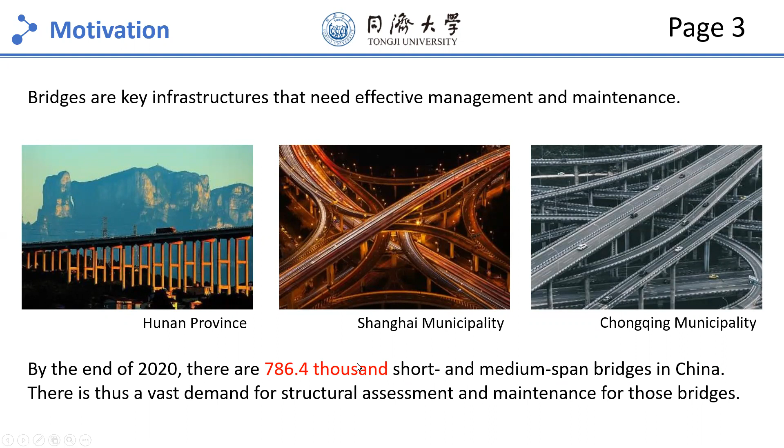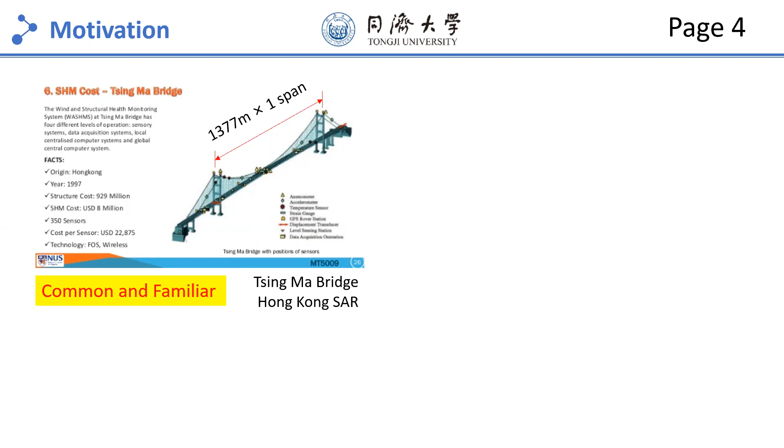When we talk about the bridge structural assessment, a common and familiar scenario is the engineering practice of the structural health monitoring on large-scale bridges. As this figure shows, the traditional structural health monitoring technique deploys an electronic system on the bridge, including sensors, wires, sampling instruments, and then we use the data recorded by the system to do structural assessment.

However, when it comes to short and medium span bridges, this method is inapplicable because small bridges are too many to deploy an electronic system on every bridge. Therefore, we need a new assessment approach for those bridges.

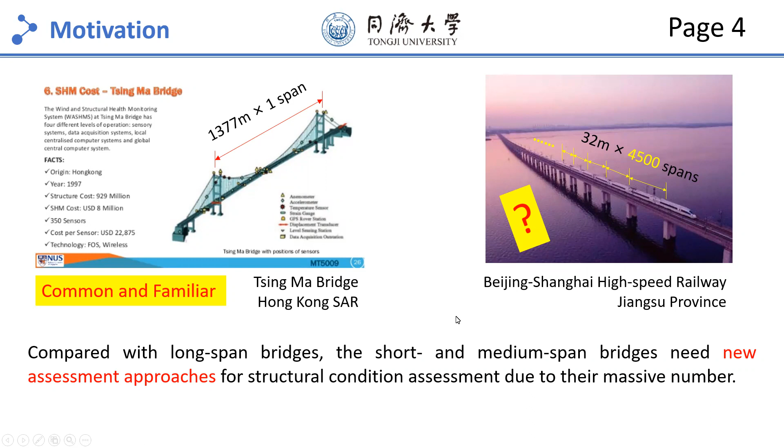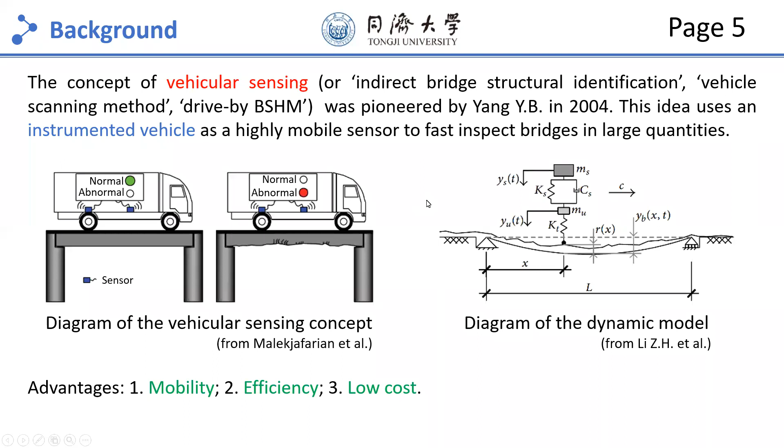Fortunately, a concept called vehicular sensing seems quite suitable for the assessment of small bridges. This concept uses an instrumented vehicle as a highly mobile sensor to indirectly measure the vibration of bridge structures. Since there is no need to deploy any sensor on the bridge, the vehicular sensing approach has the potential to fast inspect bridges in large quantities.

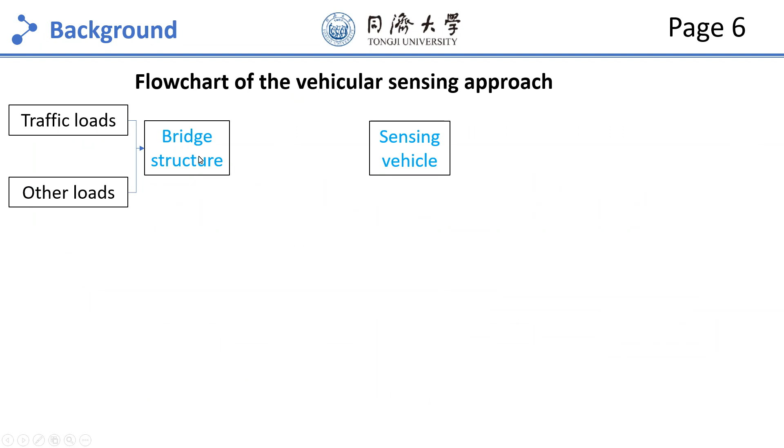This flowchart illustrates the vehicular sensing approach. As we can see, there are two subsystems. There are bridge system and vehicle system. Because of external loads, the bridge will vibrate, and then the bridge vibration will cause the sensing vehicle to vibrate as well. So the vibration of sensing vehicle will contain the bridge vibration component.

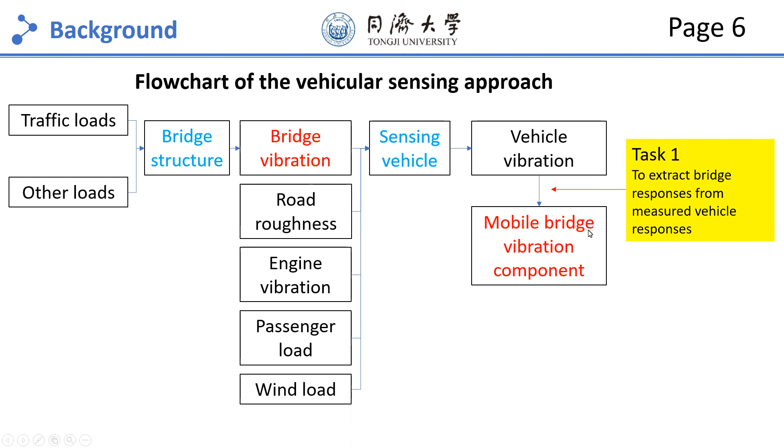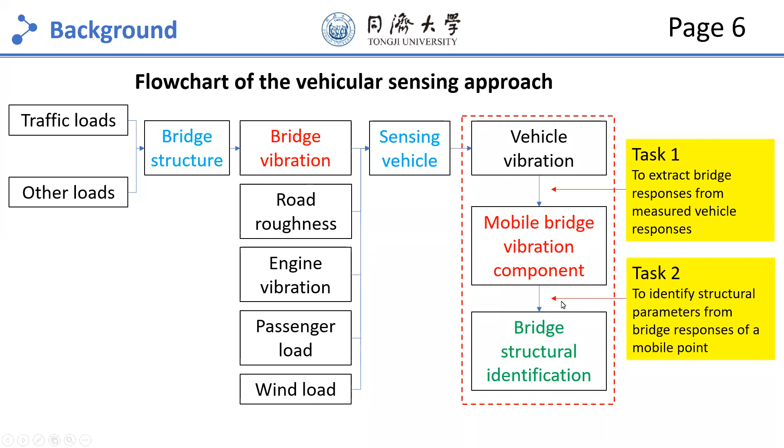However, other excitation sources such as road roughness, engine vibration, passenger load, and wind load, they will also cause the sensing vehicle to vibrate. So the first task of vehicular sensing is to extract the bridge vibration component from the measured vehicle responses. Then the second task is to identify bridge parameters from the extracted bridge vibration component. And this is the framework of the vehicular sensing approach.

Over the last decade, there have been a lot of studies on the vehicular sensing, but they're still facing some challenges. The first challenge is the oversimplified modeling. Most studies are based on a beam bridge model and a quarter car model, which I think cannot fully reproduce the vehicle bridge interaction. So I did some refined simulation in my studies.

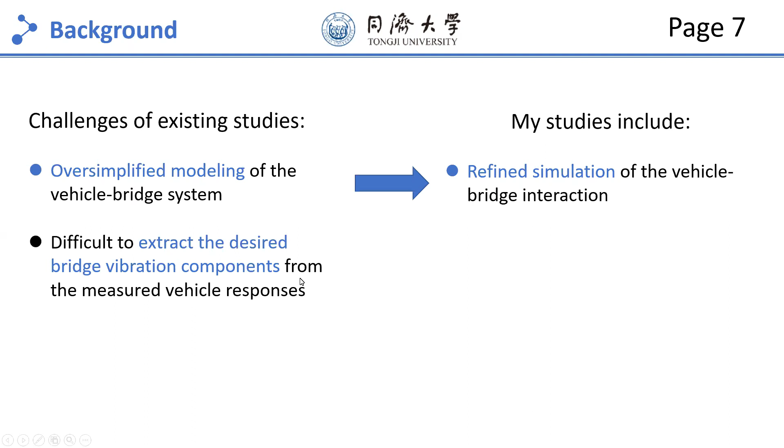Second, many studies are experiencing difficulties in the extraction of desired bridge vibration components from the measured vehicle responses. So I proposed some new methods to get the components we need in my studies. Third, but not least, most studies on the vehicular sensing are based on theoretical analysis or numerical simulation. There is a lack of experimental verification. So I carried out some experiments on real bridges with a real car.

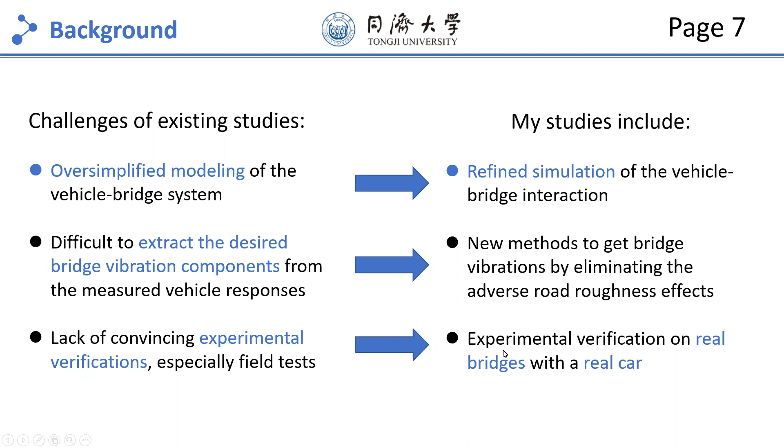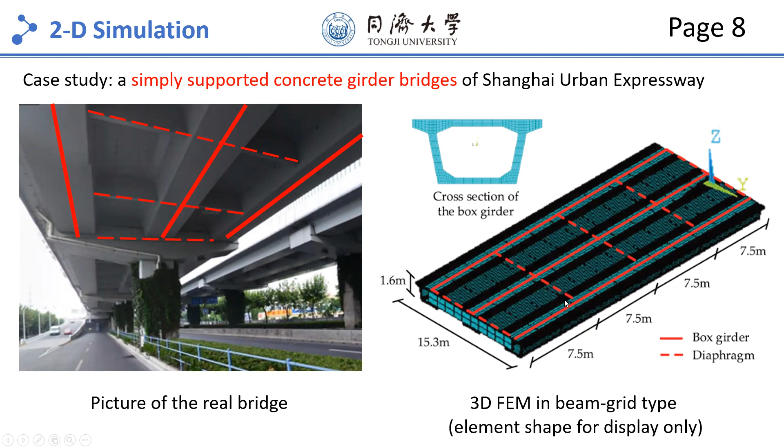In terms of vehicles, I designed a unique vehicle which consists of 1 tractor and 3 sensing trailers. The tractor is a normal truck used to tow the sensing trailers and excite the bridge. There is no sensor on the tractor. The sensing trailer only has 1 axle, and they are instrumented with accelerometers. This design provides many benefits, including the elimination of the road roughness. I will introduce this important concept later.

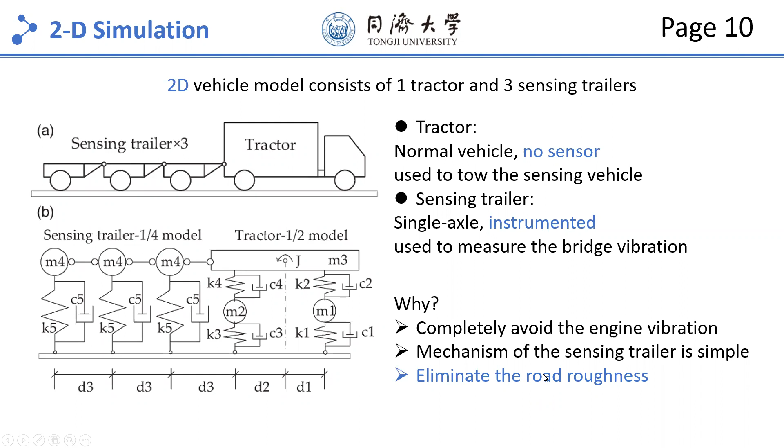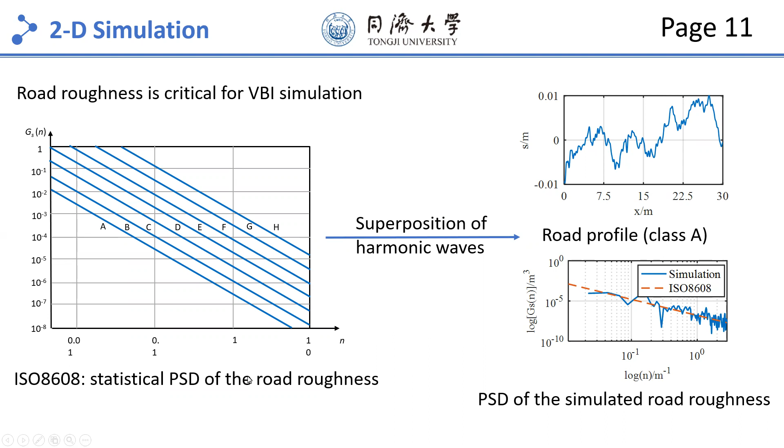Simulation of the road roughness is also crucial to the simulation of vehicle-bridge interaction. And here I simulated the road roughness according to the international standard. The bridge model and the vehicle model are assembled with an assumption that wheels and road surface are closely contacted. Then I simulated a numerical case as this diagram shows. The simulation was done in MATLAB with the Newmark beta method.

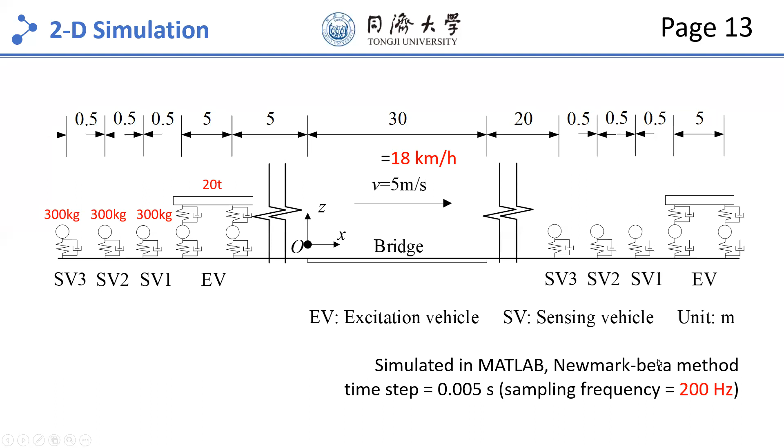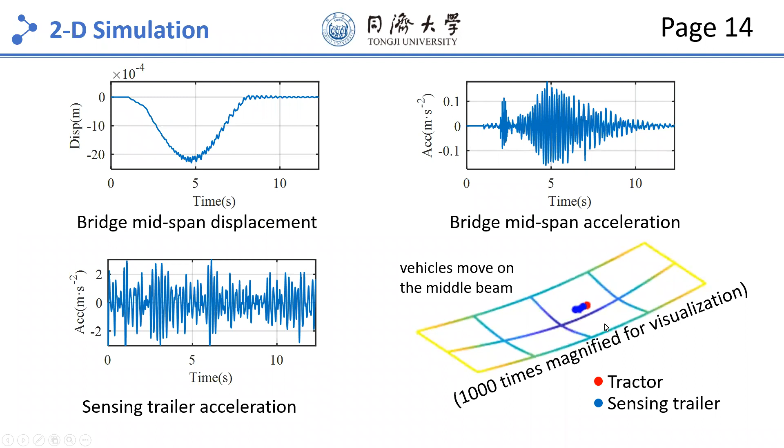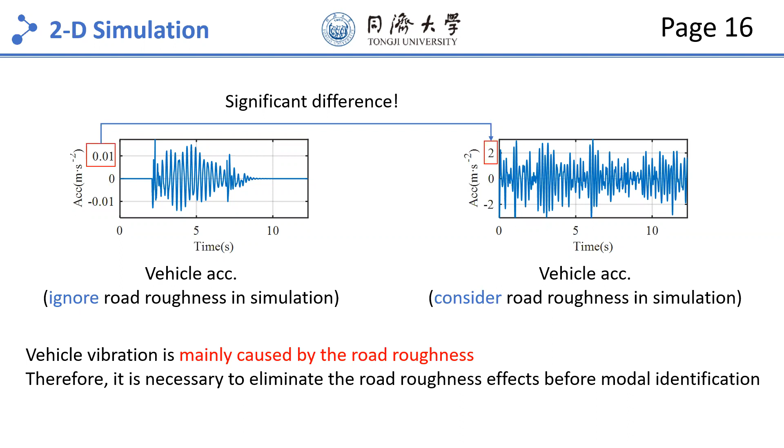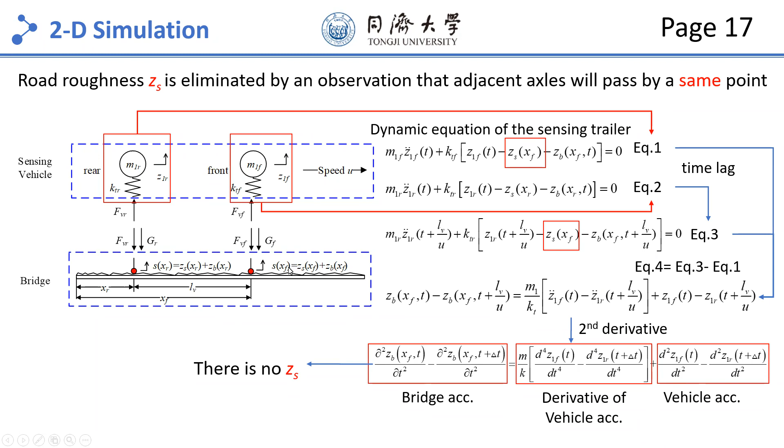So I tried to eliminate the road roughness effects on the sensing trailer. The elimination process is illustrated here. These equations look complicated, but the idea is actually very simple. Here I use an observation that 2 adjacent axles will pass by the same point on the road with a time lag. Since the road roughness at the same point is a constant, subtracting the accelerations of the 2 adjacent axles with a time lag can theoretically eliminate the road roughness.

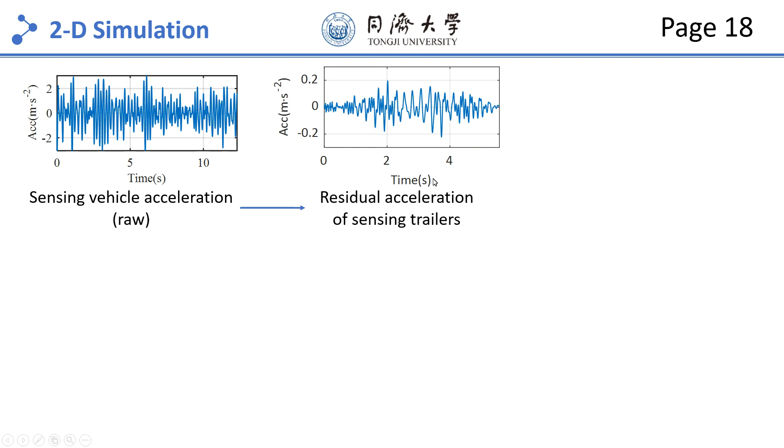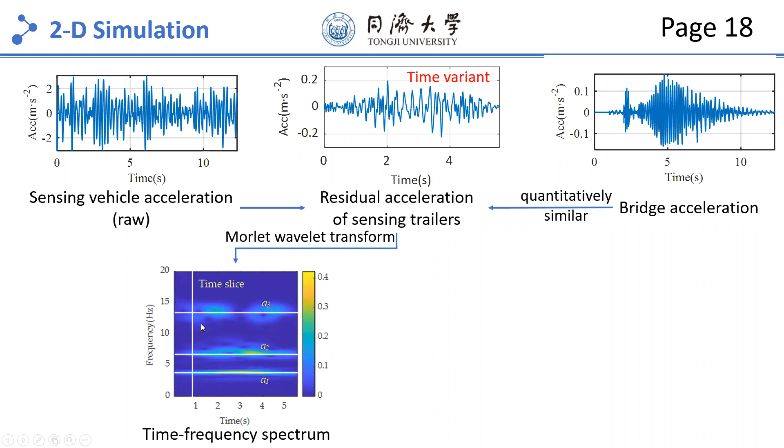This figure illustrates the results of the elimination of road roughness. After the elimination, we can find that the residual trailer acceleration is quantitatively similar to the bridge acceleration. I think that means the road roughness is successfully eliminated. Then the time frequency spectrum can be obtained by implementing the wavelet transform on the residual acceleration. Then we slice the spectrum on the time dimension, and we can identify the frequency of the bridge.

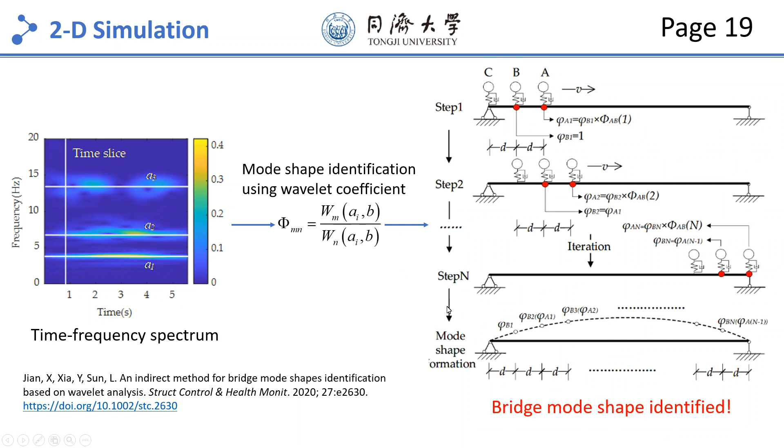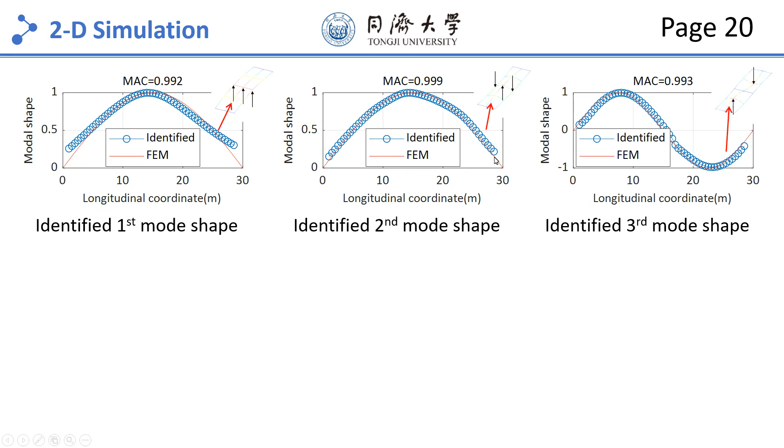Subsequently, according to the wavelet-based modal analysis theory, I proposed a method to identify bridge modal shapes in an iterative way. The identification results of the first 3 modal shapes are plotted here. As you can see, the identified modal shapes have high accuracy and spatial resolution compared with the modal shapes obtained by the finite element method. Then sensitivity analysis is conducted to investigate the stability of the proposed method at different road roughness levels, different vehicle speeds, and different noise levels.

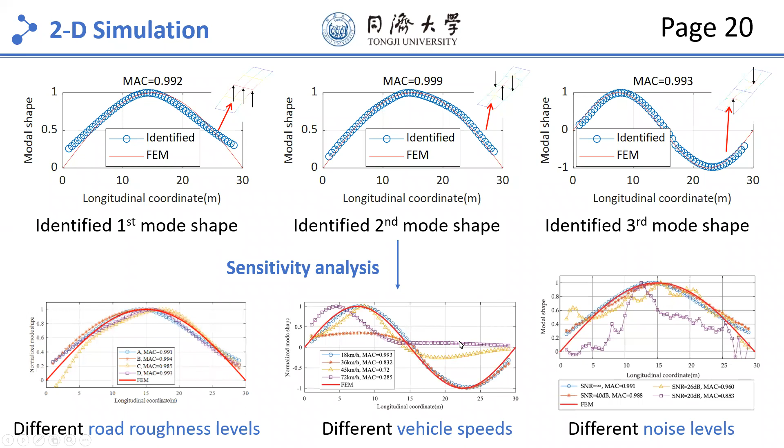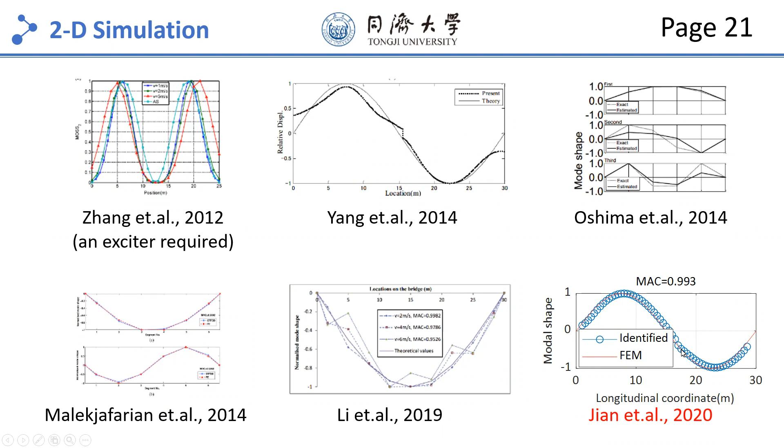Results indicate that the proposed method is insensitive to the road roughness, but it is sensitive to the vehicle speeds and noise levels. For comparison, I also display some mode shapes identified by other studies. In this slide, as you can see, my identification results perform better. So in this section, I proposed a method to identify bridge frequencies and mode shapes from the acceleration of vehicles. And the method has advantages over other studies.

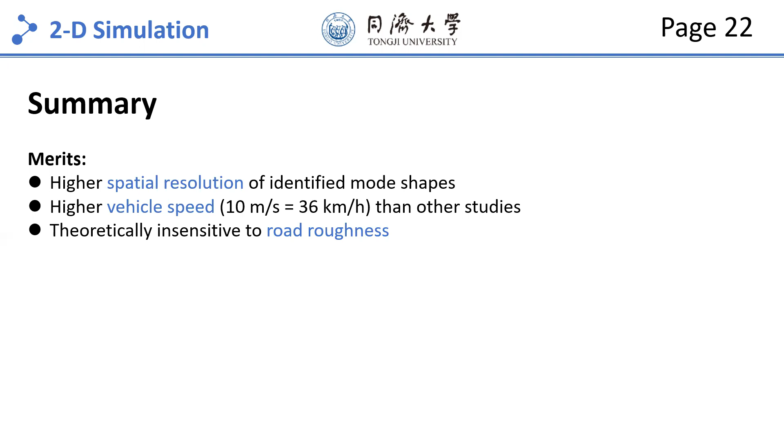But you may ask, does this method really work in engineering practice? Unfortunately, my answer is no. This method is inherently too sensitive to noise because of the iterative multiplication when identifying the mode shapes. Also, it requires 3 sensing trailers. As you know, towing 3 sensing trailers on the road is not very practical. And last but not least, in the simulation, the vehicle is 2-dimensional, but real vehicles are all 3-dimensional. So I think there is still a gap between the 2D simulation and the 3D simulation.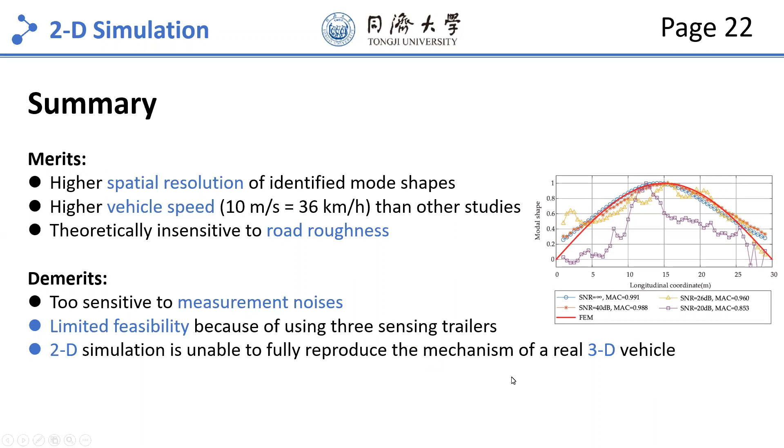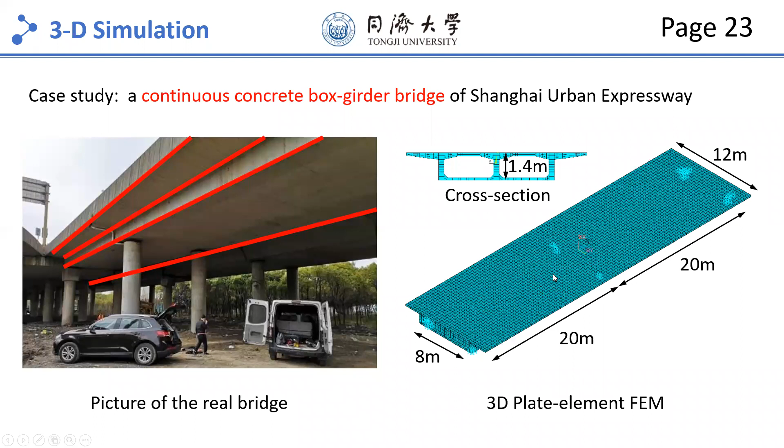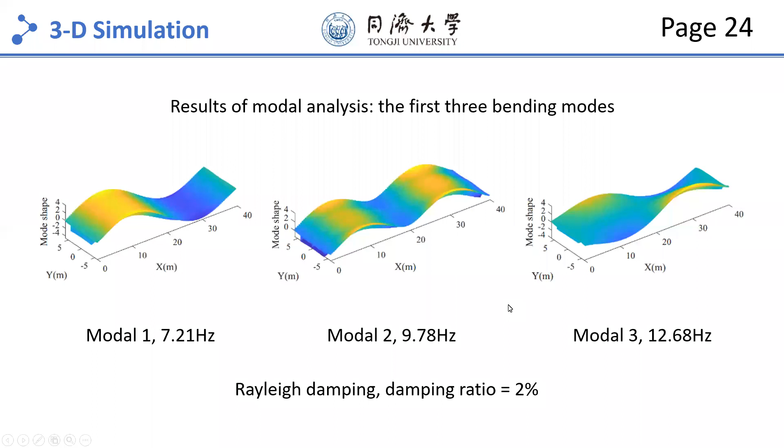Therefore, next, I decided to carry out another, 3D numerical simulation. There are seldom researchers using a 3D simulation to study vehicular sensing. And in this simulation, the bridge is simulated with a 3D plate element model. According to the modal analysis, the first 3 modes of the bridge are displayed here. And the vehicle is simulated with a 3D full car model, which has 7 degrees of freedom.

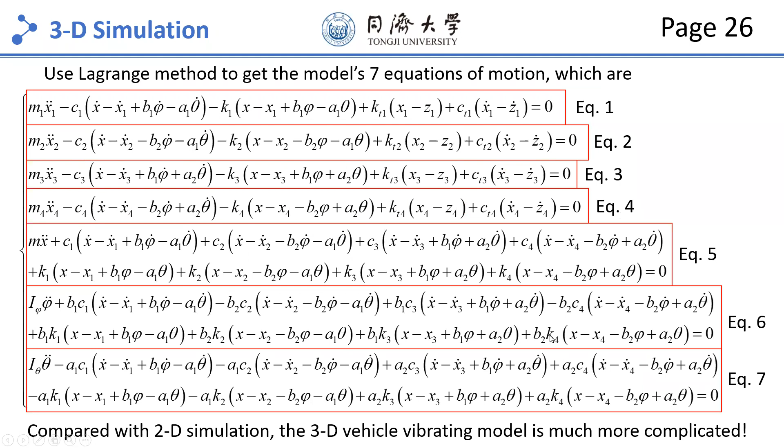The vehicle model's equations of motion are shown here. There are 7 equations in total. As you can see, compared with the 2D vehicle model, the 3D vehicle model is much more complicated because this vehicle has more degrees of freedom and more parameters. To conduct a numerical simulation, these equations are rewritten in matrix form.

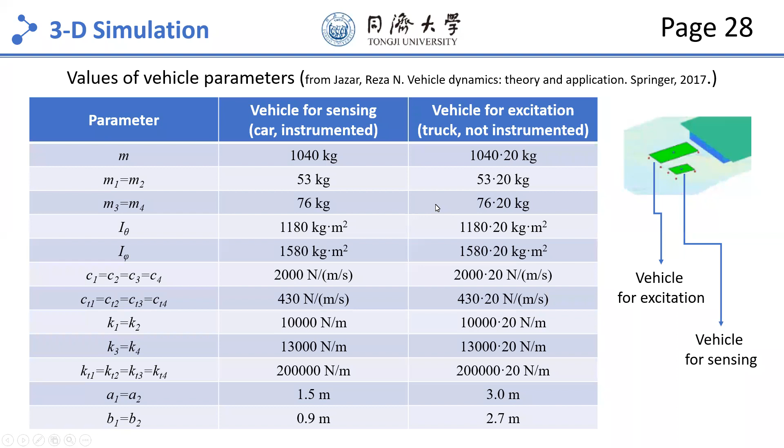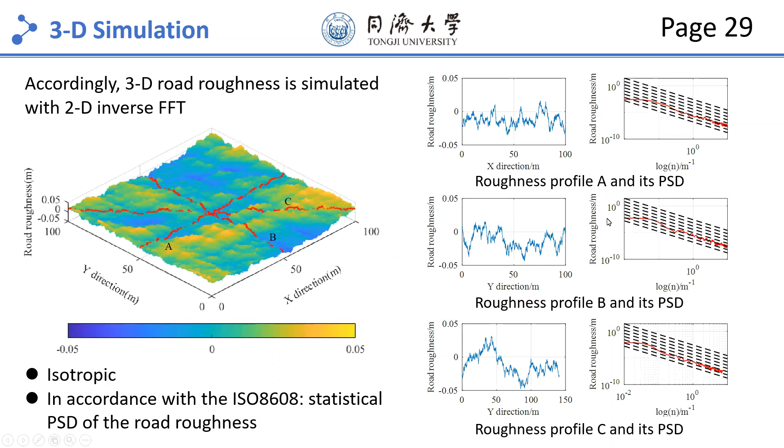And in the simulation, I use 2 vehicles. The small vehicle shown here is a car used for vehicular sensing. And the large vehicle is a truck used to excite the bridge. Parameters of the 2 vehicles are shown in the table. Accordingly, the road roughness is also simulated in a 3D form. The 3D road roughness surface is assumed to be isotropic, which means it has uniform physical properties in all directions, as the right figure shows.

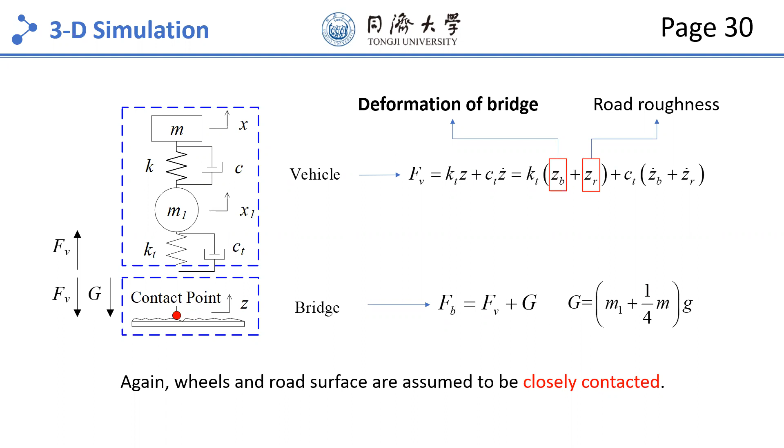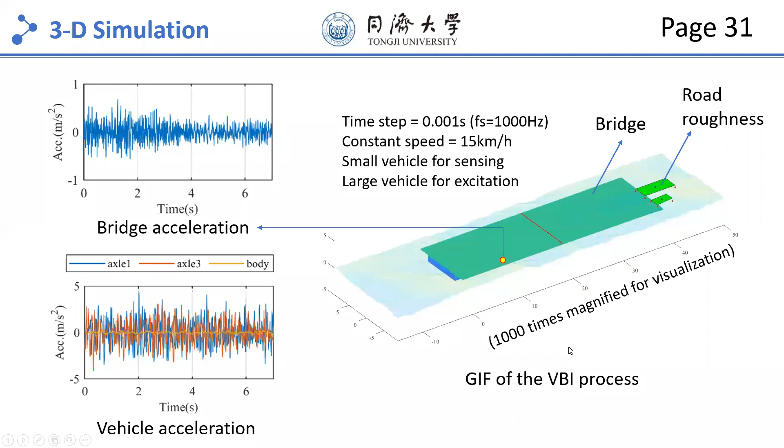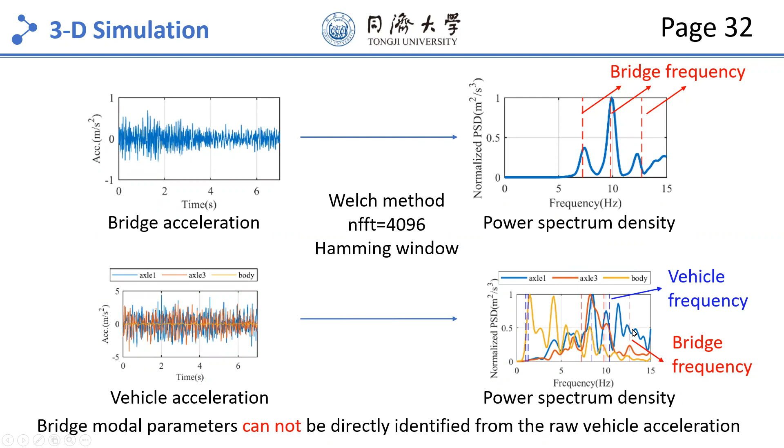Similar to the 2-dimensional simulation, the vehicle and the bridge are also assembled with the assumption that the wheels and the road surface are closely in contact. Then a case study is carried out and the simulation results are visualized here. Also, as you can see, the time history curves and the GIF here show the simulation results are reasonable for a vehicle bridge interaction system. So by observing the power spectral density of the bridge acceleration and the vehicle acceleration, we can know that once again, bridge modal parameters cannot be identified directly from the vehicle acceleration.

So similar to the two-dimensional simulation, it is imperative to first eliminate the road roughness effects before we do modal identification on bridges. To do so, we consider the equations of motion of 2 adjacent wheels. To eliminate the road roughness effects, I subtract the acceleration of the front wheel and the rear wheel. However, for a 3D vehicle model, the subtraction isn't as straightforward as in the 2D model because we have to consider the interaction between the different wheels and the vehicle body.

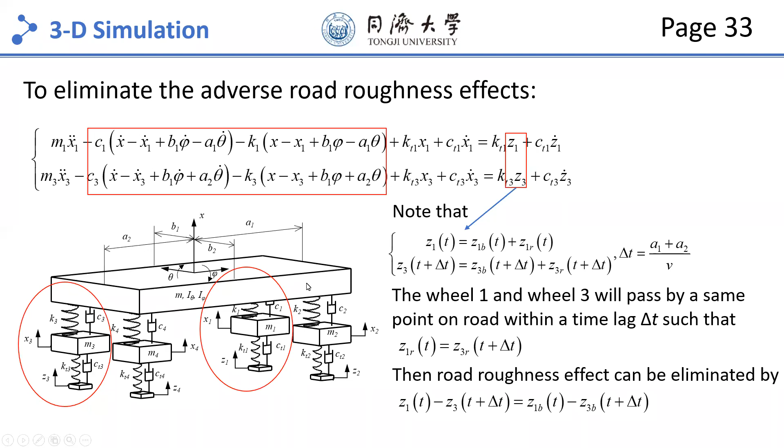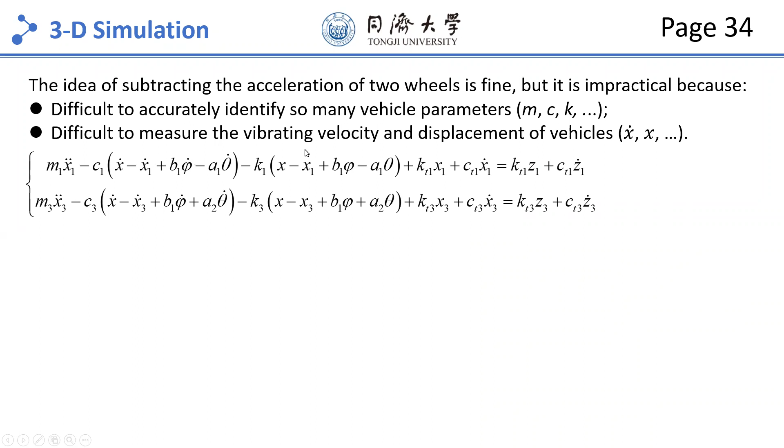Moreover, subtracting the acceleration of front and rear wheels in the time domain is very difficult, because on the one hand, it is difficult to identify so many vehicle parameters. And on the other hand, I think it is difficult to measure the vibrating velocity and displacement of vehicles in practice.

In view of this, I proposed a subtraction method in the frequency domain. First, I applied the Fourier transform on the wheels' equations of motion, and then I got the following equations. As you can see from the equations, the benefit of using the frequency domain is that we only need to identify one comprehensive parameter of vehicles for subtraction. And the comprehensive parameter highlighted with the red box here looks quite like the frequency response function. And we know that the frequency response function can be easily identified in some modal tests.

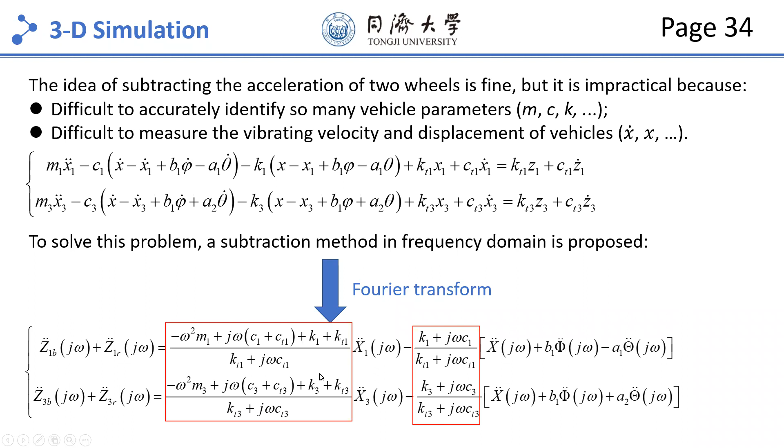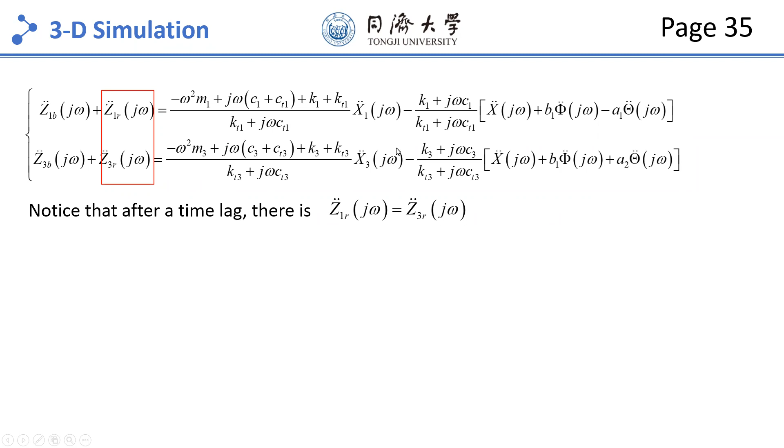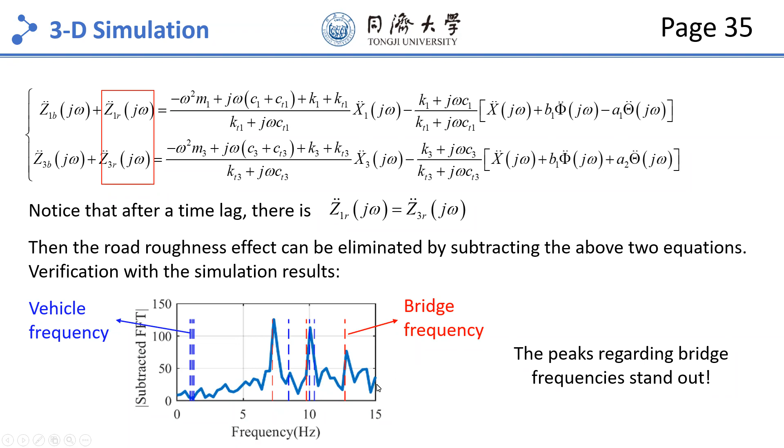Subsequently, the road roughness effects can be eliminated by subtracting the above two equations with a time lag. This method is also verified with the data generated from the 3D simulation results. As you can see, the peaks regarding the bridge frequencies are clearly visible in the spectrum after the subtraction. And that means the bridge frequencies can be successfully identified from the acceleration of vehicles.

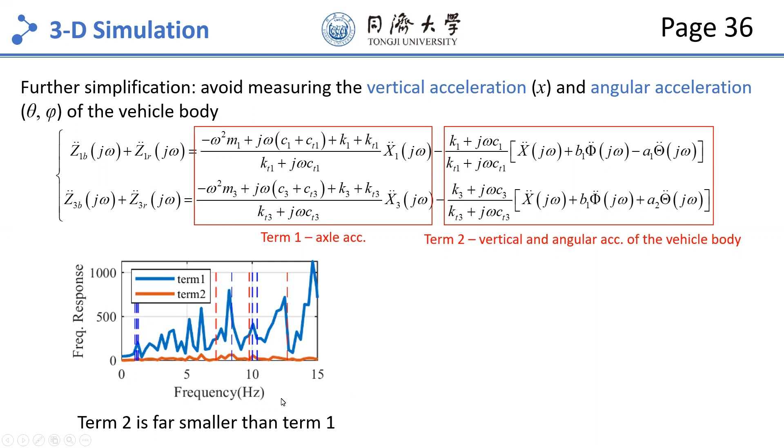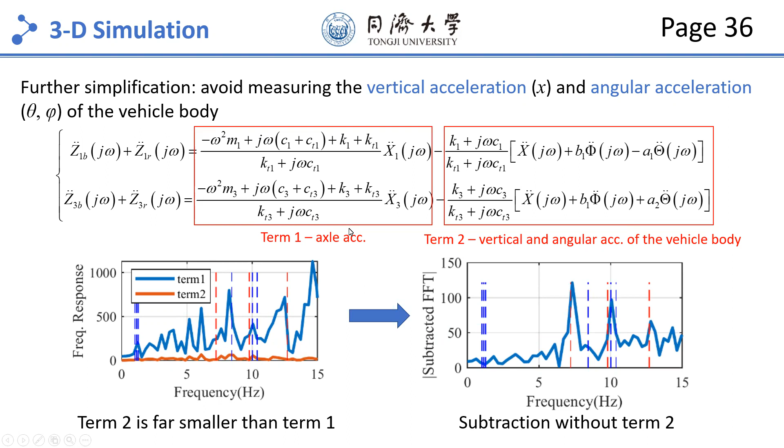Another problem is that in these two equations, the angular and vertical acceleration of the vehicle body are difficult to measure. However, I found that the frequency responses of vertical and angular acceleration of the vehicle body are much smaller than the wheel acceleration. So during the subtraction, we can basically ignore the angular and the vertical acceleration of the vehicle body, which means we can drop the term 2, or we only use the term 1 here. So as a summary of the 3D simulation, I proposed a method to identify bridge frequencies from the wheel acceleration of a 3D full car model.

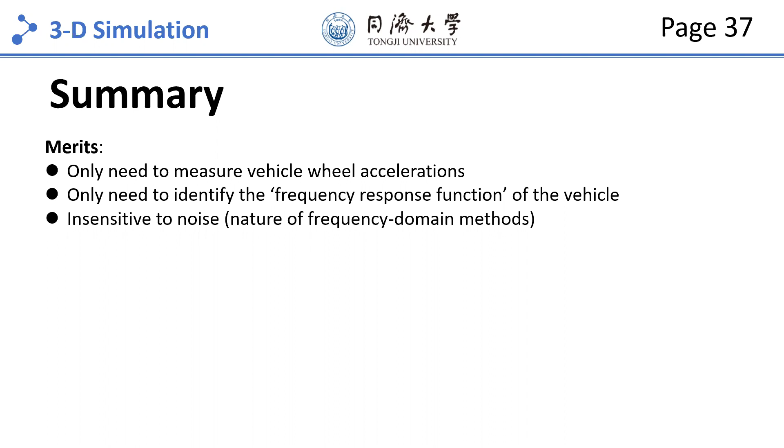This method looks nice, but we can ask again, will it work in real engineering cases? And the answer is unfortunately no, because I found that this method is too sensitive to the error of measuring the time lag for acceleration subtraction. Even a tiny error of time lag will make this method ineffective. As you can see, if we subtract the acceleration responses with 0.99 delta t, the peaks of the bridge frequencies are invisible as a result, let alone 0.9 delta t. However, in real engineering practice, such tiny errors are inevitable.

So why would this happen? I think that it is because for the vehicular sensing approach, the signal-to-noise ratio is too low. So if we take the bridge vibration component in the vehicle responses as the signal, and we take the vehicle responses caused by the road roughness as the noise, we can find that even if we reduce the noise to a large extent with the proposed subtraction method, the remaining noise is still much larger than the signal.

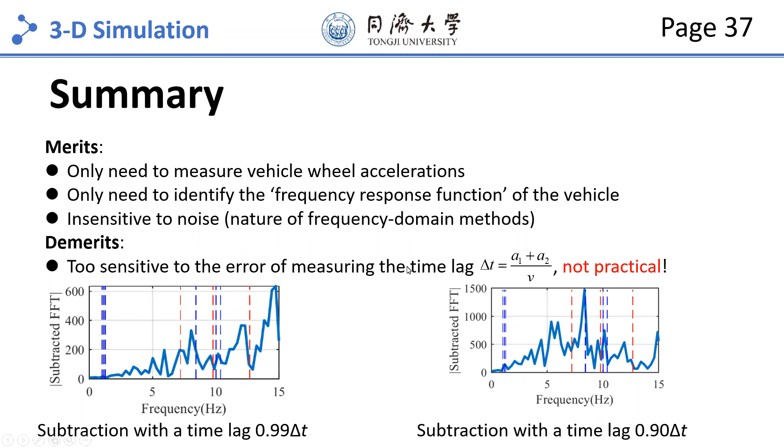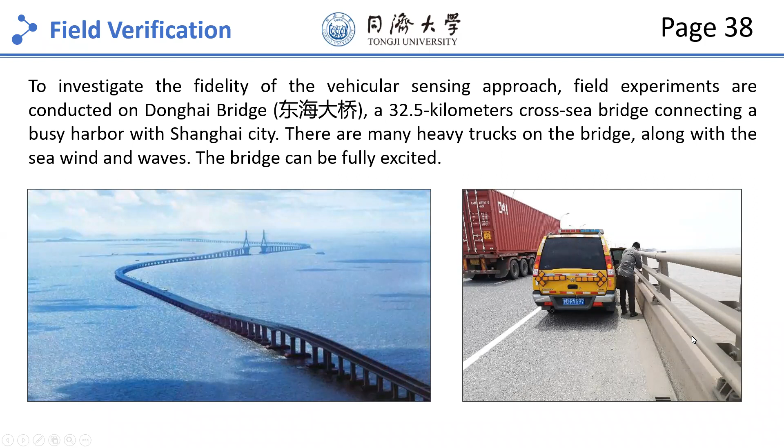Finally, I carried out some experimental studies on a real bridge with a real car. The bridge is a sea-crossing bridge connecting a harbor with Shanghai city. There are many heavy trucks on the bridge, along with sea wind and waves. So I think the bridge is fully excited. The vehicle used in the experiment is shown here. It is instrumented with 8 accelerometers. And there are 2 extra accelerometers deployed directly on the bridge when the vehicle parks. I did this to compare the vehicular sensing approach with the traditional structural health monitoring approach.

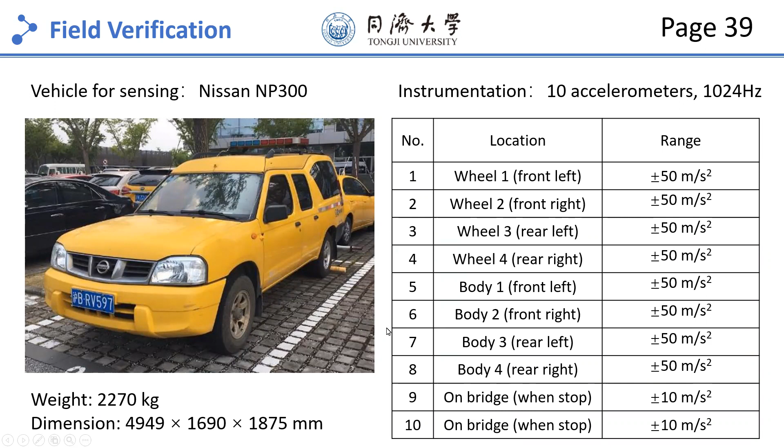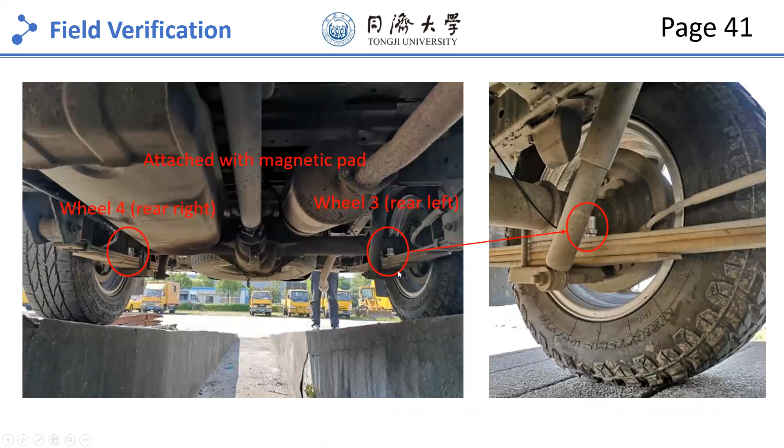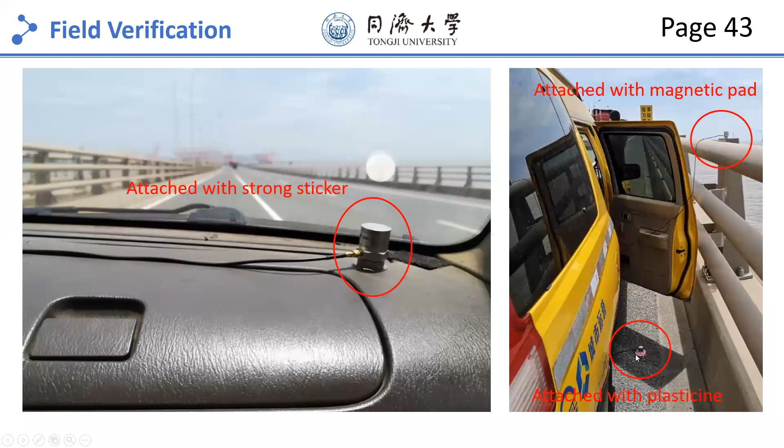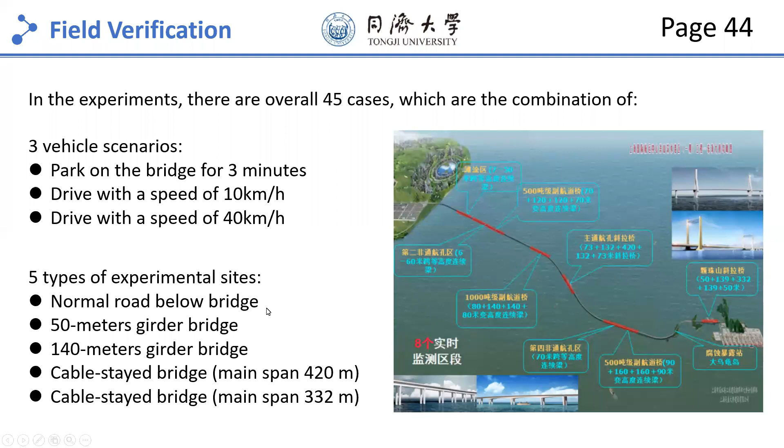And these pictures display details about the installation of accelerometers on the vehicle. These accelerometers are installed with a magnetic pad or strong stickers. And this picture shows how the 2 extra accelerometers are placed on the bridge. So in total, I carried out 45 experimental cases. And these cases are the combination of 3 vehicle scenarios and 5 different experimental sites. Among these 45 cases, I picked several cases to do some preliminary analysis.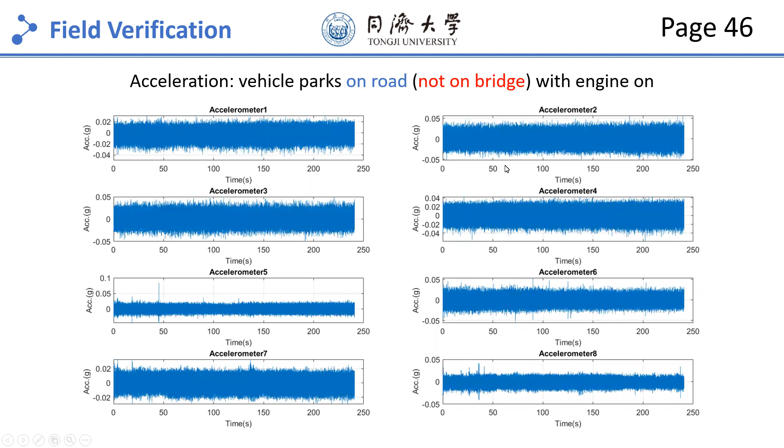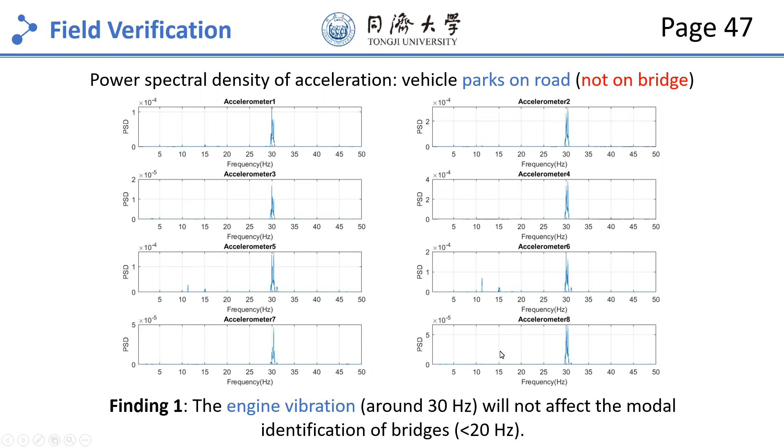The first analysis is to investigate the effects of engine vibration on the vehicular sensing. I did a power spectral analysis on the acceleration of a vehicle when the vehicle parks on the road with the engine on. And I found that the engine vibration has a frequency of around 30 Hertz. And the engine vibration will not affect the modal identification of bridges because the frequencies of bridges are usually smaller than 20 Hertz.

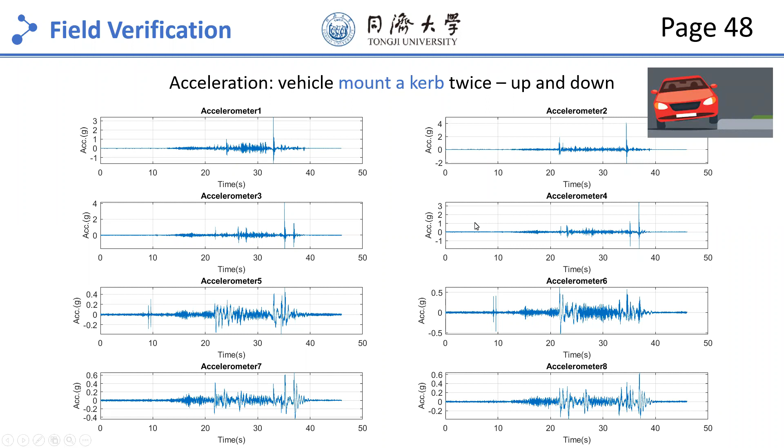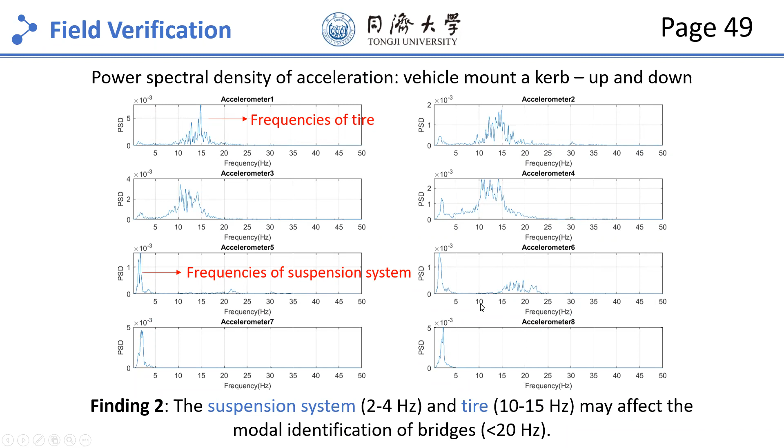The second analysis is to investigate the effects of the vehicle's suspension system and the tire. I did an impact test on the vehicle by letting the vehicle mount a curb. Results of the power spectral analysis show that the frequency of the suspension system is around 2 to 4 Hertz, and the frequency of the tire is about 10 to 15 Hertz. And they are actually overlapped with the frequencies of bridges. So I think the suspension system and the tire may affect the modal identification of bridges.

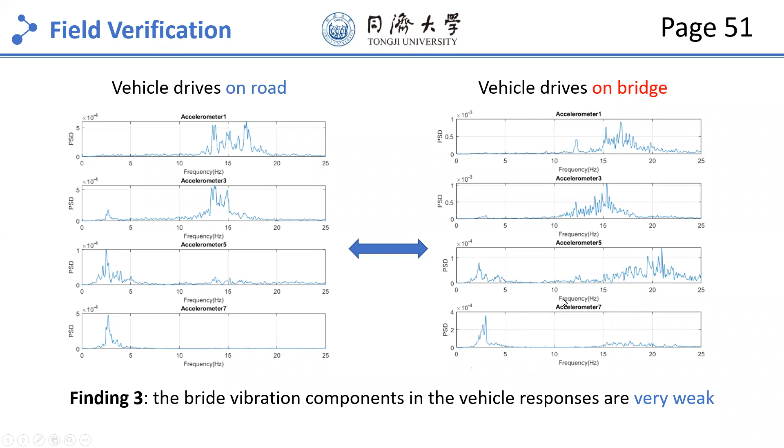The third analysis is to investigate the effects of bridge vibration. I compared the acceleration of a vehicle moving on the road and the vehicle moving on the bridge with the same speed. Results indicate that there is no recognizable difference between the on-road and on-bridge signals. So I think this means the bridge vibration components in the vehicle responses are very weak.

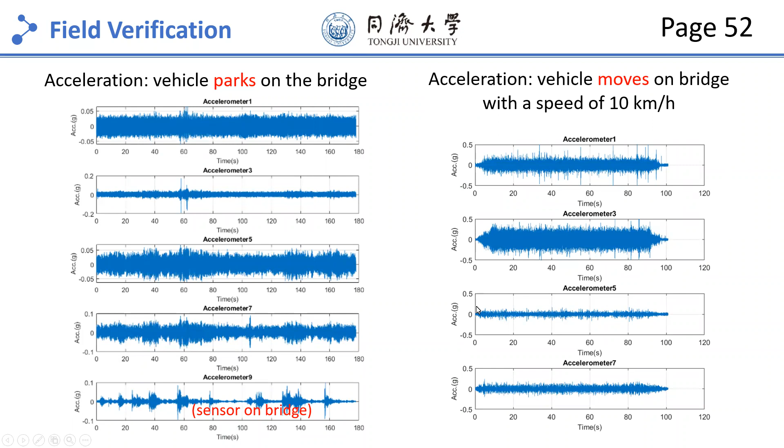The last analysis is to investigate the effects of road roughness on the vehicular sensing. I compared the acceleration of the vehicle parking on the bridge and the vehicle moving on the bridge. First, the results of power spectral analysis show that when the instrumented vehicle parks on the bridge, the power spectral density of the vehicle acceleration and the bridge acceleration share some common peaks regarding bridge frequencies. I think this means it is feasible to identify bridge frequencies from vehicle acceleration when the vehicle parks on the bridge, because when the vehicle parks on the bridge, there is no road roughness effect.

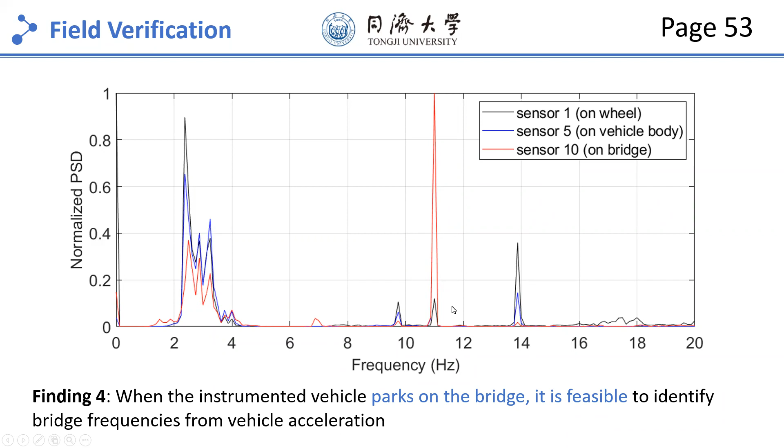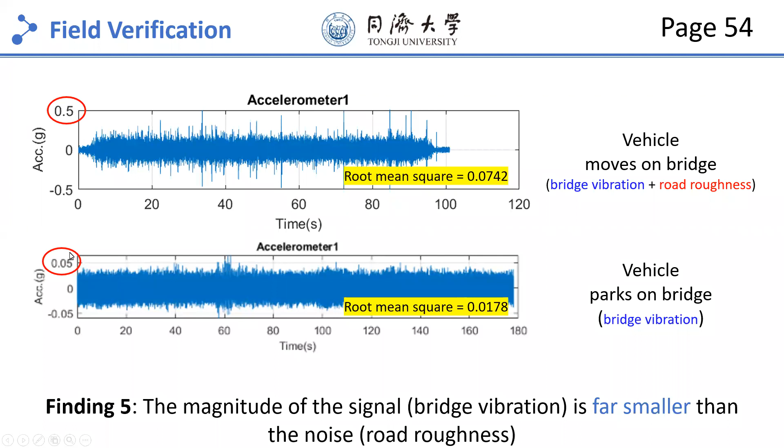Second, the comparison between the magnitude of the acceleration of a moving vehicle and a parking vehicle indicates that bridge vibration components in the vehicle responses are much smaller than the vehicle responses caused by road roughness. As you can see, the magnitude of the vehicle acceleration caused by the bridge vibration is approximately only one-tenth of the vehicle acceleration caused by road roughness.

So, in conclusion, based on my studies on the vehicular sensing approach, I personally think that bridge modal identification using the vehicular sensing approach is very challenging. In real engineering practices, this approach may encounter some significant difficulties. The first difficulty is the ultra-low signal-to-noise ratio. For the vehicular sensing approach, the signal we need, that is the bridge vibration component in the vehicle responses, is significantly smaller than the road roughness effects. So it is very difficult to extract such a small signal from the vehicle responses.

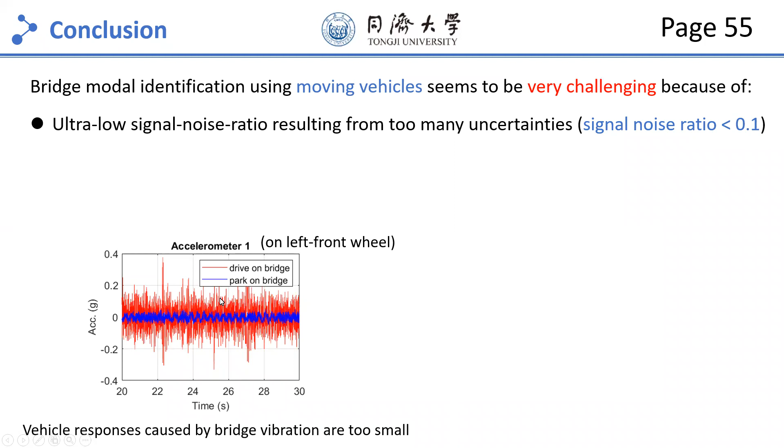The second difficulty results from the complicated mechanism of vehicles. In the theoretical investigation or numerical simulation, we always use a linear vehicle model, but a real vehicle is a complicated and nonlinear machine. So for the vehicular sensing approach, the vehicle is actually a nonlinear sensor and a filter to measure the bridge vibration. And this will absolutely increase the difficulty of signal processing because of nonlinearity.

The third difficulty, which is also the inherent difficulty of the vehicular sensing, is that the vehicular sensing signal is usually very short. For example, if the vehicle moves at a speed of 2 meters per second, which I think is slow enough, to pass a 20-meter long bridge span, then the vehicular sensing signal will only last for about 10 seconds. Using such a short signal to do modal identification or parameter identification is very difficult, because in such a case, the frequency resolution is limited.

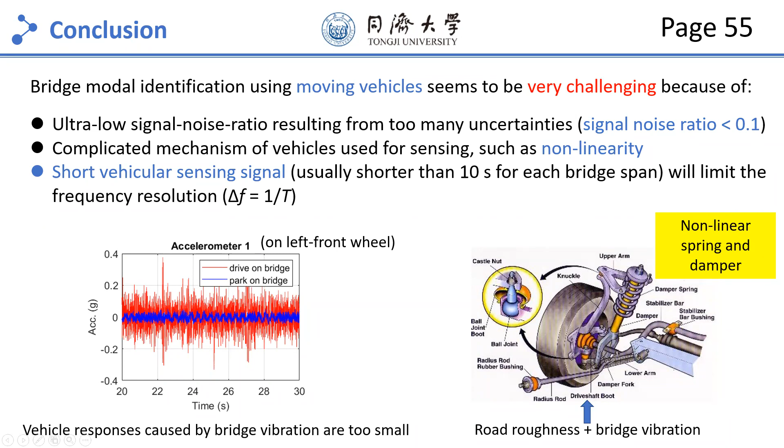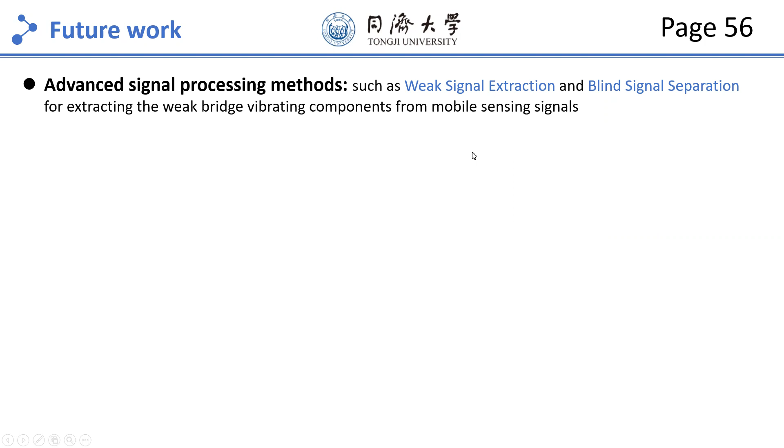And my future work may include the following 3 aspects. First, I will try some advanced signal processing methods, aiming at the difficulties of the vehicular sensing approach. I will try the weak signal extraction and blind signal separation for extracting the weak bridge vibration components from the vehicular sensing signals. Second, I will try to find an alternative platform for mobile sensing.

Here I use the mobile sensing to replace the vehicular sensing, because I think a platform like robots can also be used to carry sensors. For example, we can design a robot that can move along the guardrail of a bridge, and then we can put some sensors on the robot to do the mobile sensing. Also, we can use some small wheel robot to carry the sensors. Using the robots can avoid some inherent difficulties of using vehicles, such as road roughness, nonlinear suspension system, and some speed limits. Third, I will try a new approach to do bridge structural assessment.

With the mobile sensing approach, massive bridges of the same type can be quickly inspected, which enables the comparison between these bridges for structural assessment.

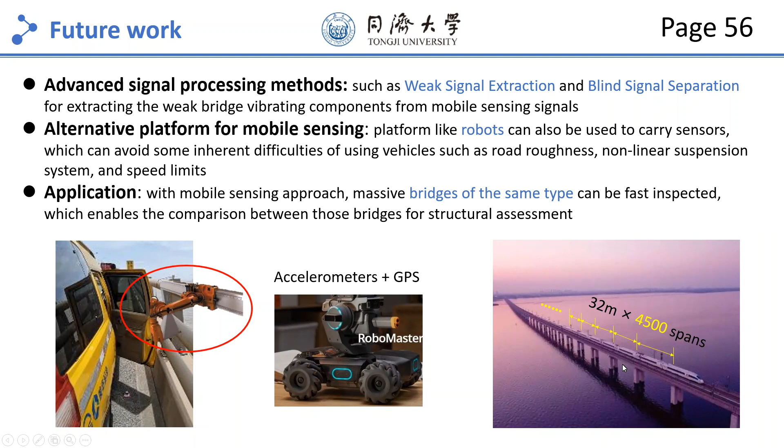At last, as a guest student, I would like to spend a few extra minutes to introduce my domestic university. Tongji University is located in Shanghai, a modern and vibrant metropolis in China. And Tongji is one of the best universities in China. I've heard that people in Zurich speak German. An interesting fact is that Tongji was actually founded by a German doctor 100 years ago. Even the name of my university, Tongji, is a phonetic approximation of the German word Deutsch. I hope my pronunciation is right.

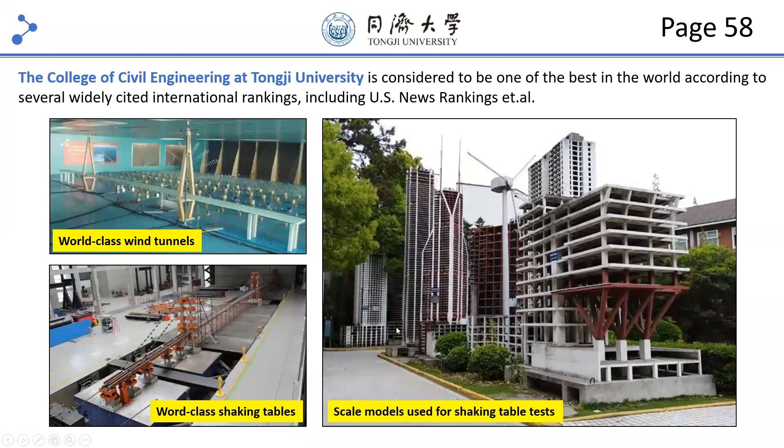And the College of Civil Engineering at Tongji University is considered to be the best in China. We have various advanced facilities to do research on structural engineering, such as world-class wind tunnels and shaking tables. We are also engaging in many important civil engineering projects in China. And the research group I belong to is led by Professor Sun Liming. Our group has 7 faculty members and over 30 students. We focus on structural health monitoring, vibration control, and seismic engineering.

I think it's very similar to the focus of Professor Chatzi's. And we sincerely welcome academic communication and collaboration. If you are interested, you can contact me.